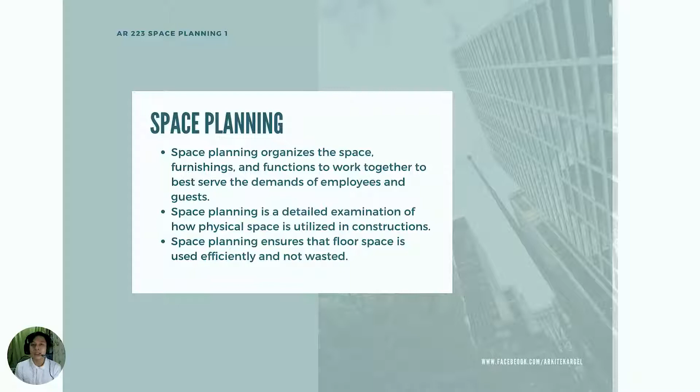Space planning, how should it be interpreted? First is the functional and zoning analysis of space - how the areas are identified. So in residential settings, there are three types of zones.

Number one is the public or social zone, in which the space caters to social activities like the entertainment room, living room, etc., in a residential house. Number two is the private zones. In a residential home, this could be compared to bedrooms, offices.

And the work zones. Work zones, materialized into a residential setting, could be the kitchen, the laundry area, the dirty kitchen, and then storage like built-in cabinets, walk-in closets, etc. So those are the zones in a residential zone.

So diagramming also is the process of placing two or three dimensional graphical presentation of the proposed space on paper. We will tackle that diagramming in the next parts.

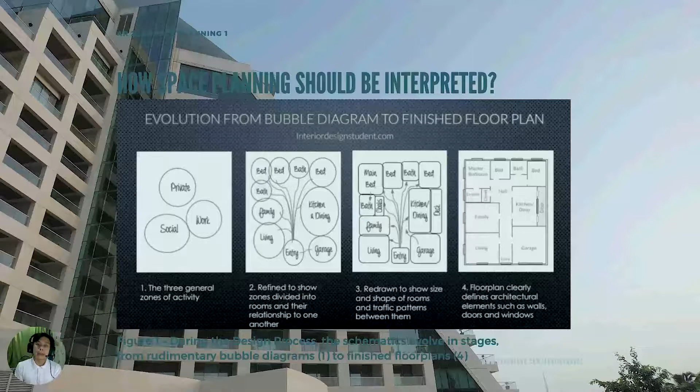Okay, so number 4, floor plan clearly defines architectural elements such as walls. So number 4 would be the rough sketch of the structure. So as you can see, the progression from the bubble diagram to the rough schematic floor plan of a building. How space planning should be interpreted.

And number two is the dimension, shape of the space. So as I am saying, architects should have the basic idea of how big the space should be. So basing from the codes, basing from Max Fajardo's book, you will have a rough idea how big a space can be when it comes to residential settings. Also, it would be really helpful if you study the basic furniture dimensions, which is also in Max Fajardo's book.

So, according to Nielsen, 80% of the available size is allocated to the living space, 10% for the passage, and 10% for storage. So, 10% passage means the circulation space, how the people will move from that initial space, and then 10% for the storage, for the utility spaces, for the built-in cabinets if it's in a residential setting, and then 80% for the living spaces, which entails the living room, kitchen, dining, bedrooms if it's in a residential setting.

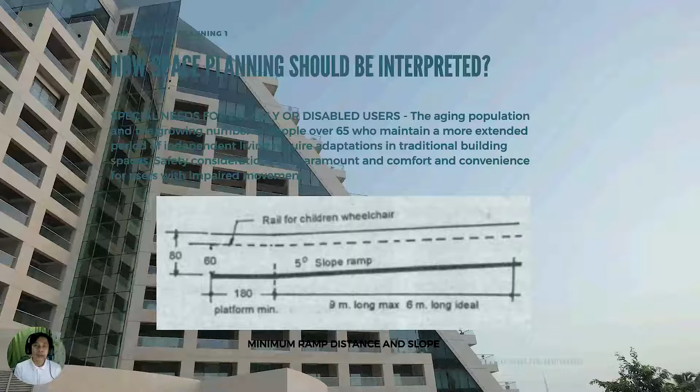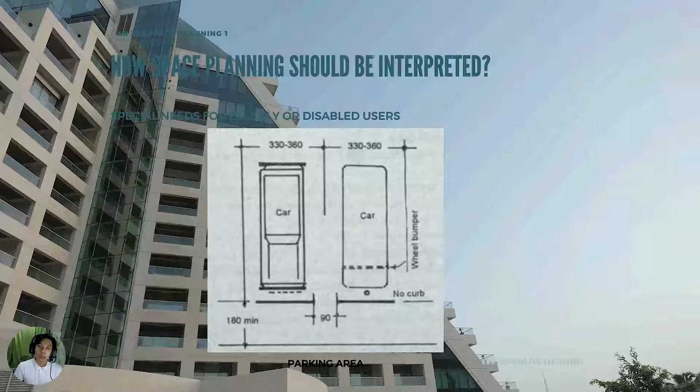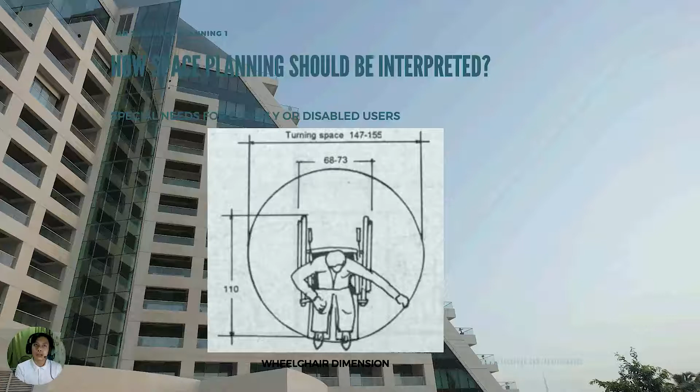Average clearances, 0.80 for those adults that require support when walking. The turning wheelchair dimension. Okay, the turning space, this is really important when you are designing hallways for a home for the aged. Yan, that's the right term. So if you are required to do a two-person hallway, you will know the dimension of the hallway.

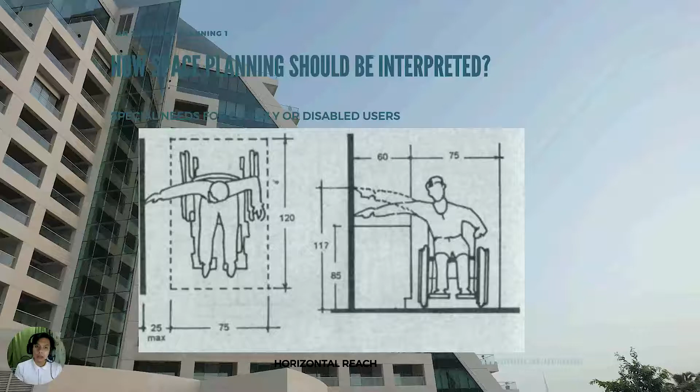Horizontal reach, if you are designing sinks, lavatories, countertops. So this is a reference. Space clearance, 1.2 for the length, and 0.75 for the width.

Okay, emotion and psychology. So I know that you have tackled this in architectural interiors, but we're just going to review it now. So space planning also entails those. Space also evokes certain moods and emotions depending on their shape. So is it tall? Is it long? The size, the scale, the materials, the colors, the textures. So some examples, small spaces evoke confinement, security, belongingness. That's why as an introvert I love spending my time in my bedroom because that's where I am most secure. Then large spaces entail freedom. Tall spaces, exhilaration, awe.

Application of principles of design. So harmony, emphasis, rhythm, balance, and scale. This is tackled also in your TOA. But yeah, we're going through with it and I'm just going to give you examples. Scale and proportion. So be sure that when you are designing spaces, it's configured to a human scale. Harmony, so it depends on the form, but usually this is the form wherein it is uniform, following only a uniform shape.

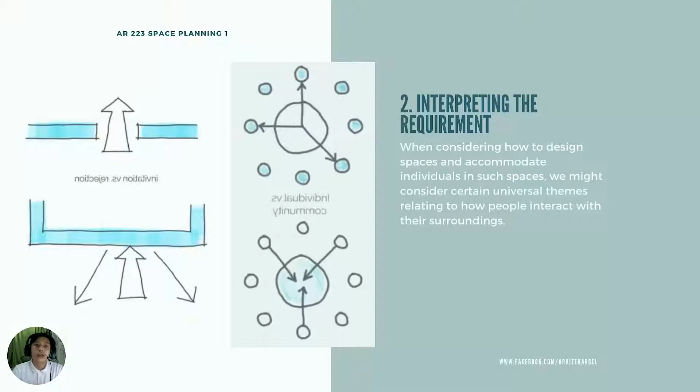So once you have the proper information of what spaces are required, you have to ask yourself the initial questions: should they be adjacent to one another, should they be open to everyone, or should they have privacy? So how will the spaces be connected from different sources of traffic circulation to a major one and vice versa?

So another one is combination versus separation: should the spaces be combined or should they be apart from one another? So I can only imagine that this setting in design is usually applied to complex buildings. So usually these white areas promote other spaces or views.

Integration versus segregation. So another thing about the privacy. So from one space to another, should they be connected in some way or should they be private? And then openness versus seclusion. So should a space be very private, intimate, or open?

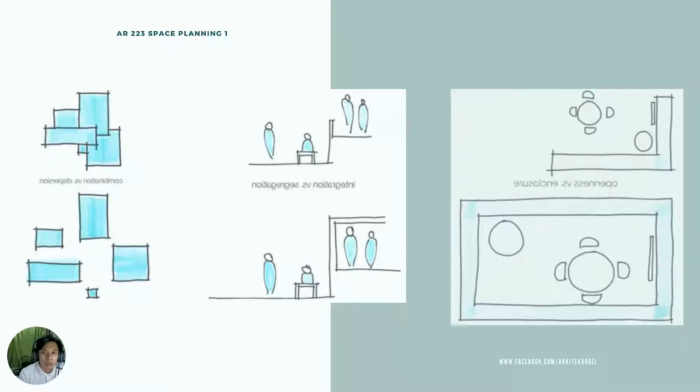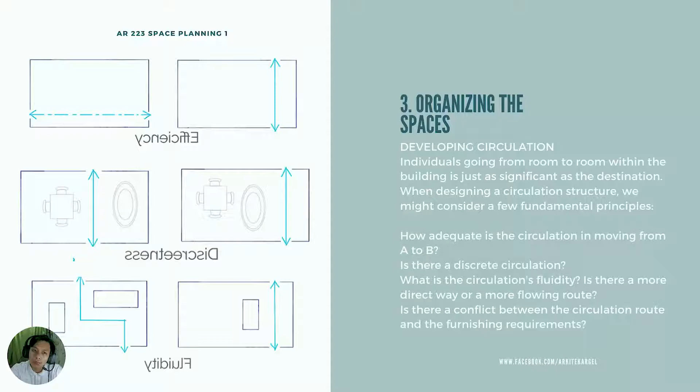And then after you have carefully analyzed the relationship, how the spaces will be connected to one another, it's time you create a diagram. So the relationship diagram transforms your design from the data you have collected to a more visual representation of how to physically plan out your floor plan. So from the initial inputs that you have gathered, from the studies that you have done on your programming, then it's time to create now your bubble diagram.

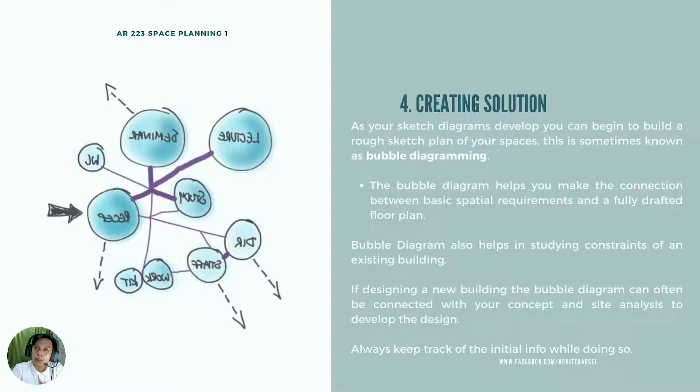Okay, bubble diagram. Don't forget this. This is the basic layout you can do when you are initially starting your floor plan. So it's the mother of all plans. So it is often helpful at this phase to have a broad notion of the size needs of specific regions. For example, in a residence, knowing the approximate size of a double bedroom or an average living room is helpful to begin making sense of the room. So after you have done your basic layout, you have to imagine now how big the space will be on the actual floor plan. So you have to have that rough image of the floor plan.

Experiment with various alternatives and arrangements, and sketch your thoughts about how the spaces will link to one another. So make notes on each choice as you go through it, noting any pros and disadvantages, benefits, and so on, so that you can discard options that you don't think will work at a later stage. So that's why you do not just stop with one bubble diagram. You have to create more and more options. That is a part of the creative process the architects undergo through the initial design process. So you can't skip that.

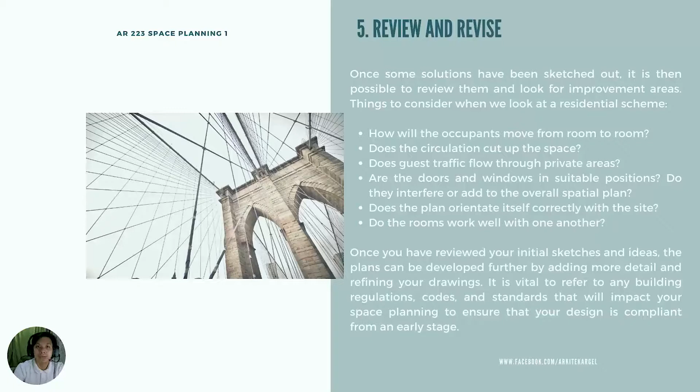Instructions: submit until 5 p.m. today. Submit to Google Classroom in a landscape orientation format, not portrait, of the image. I grade based also on the quality of the image, so enhance your picture submissions. Don't forget to hand in your submission. So there are students that always forget handing in their outputs. So don't forget to hand in because late submission is equal to deduction of points. And of course, for non-compliance to my set of instructions, I will return your submission back to you.